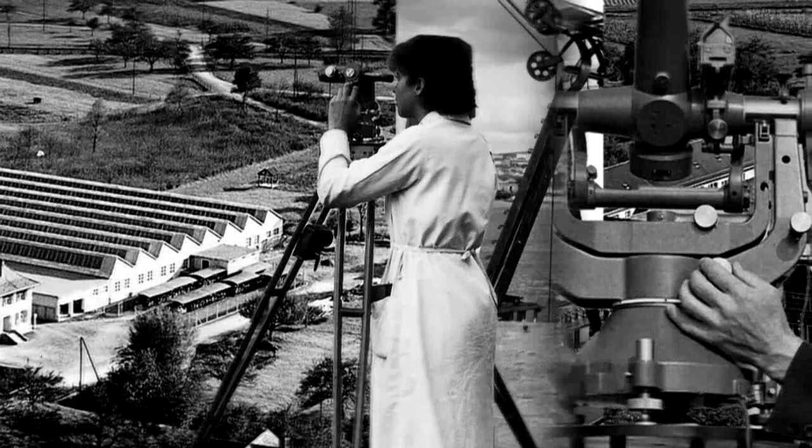In 1921, the engineer Heinrich Wild founded a company by the name of Heinrich Wild Werkstätte für Feinmechanik und Optik, situated in the Swiss Rhine Valley. He rose to international fame with his precision theodolites. Various innovative instruments devised for measurement techniques have ever since been produced by his company.

In 1990, the startup company Wild Heerbrugg was taken over by Leica. In 1998, Polymeca arose from Leica Geosystems, which is now part of the Swedish-based Hexagon Group. Polymeca remained faithful to the legacy of the Swiss pioneer Heinrich Wild.

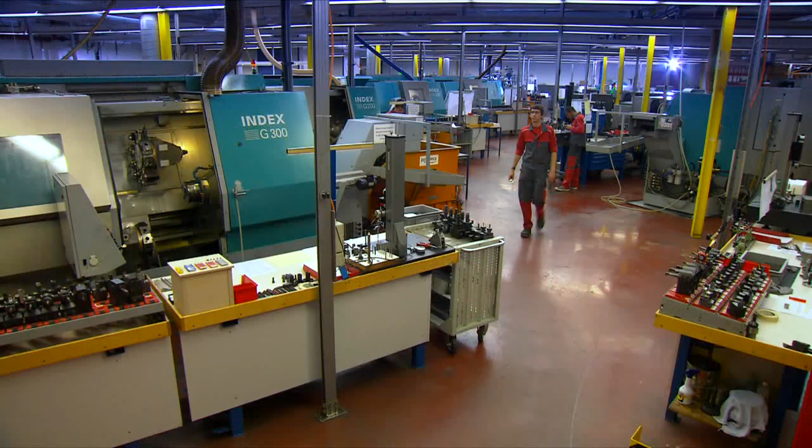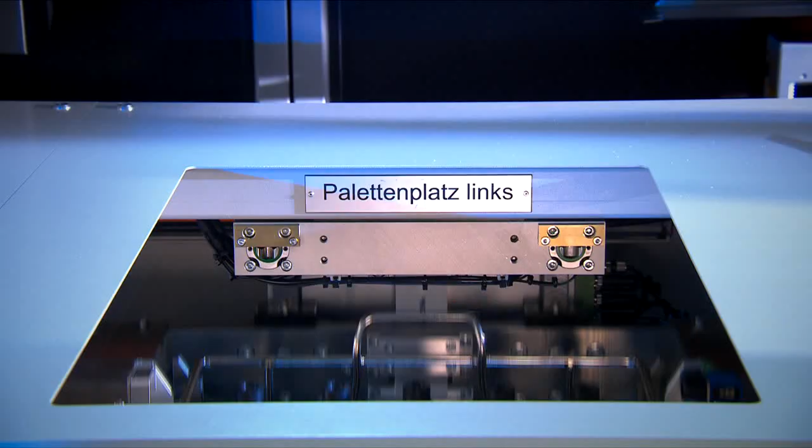With its 130 highly qualified specialists, the company ranks among the world's leading providers of optical products with fine precision mechanics, intended for the discerning client both from the respective industry and from Hexagon's network of subsidiaries. As a one-stop shop provider, Polymeca produces mechanical components and systems for industries that require items with precision degrees in the micrometer range. Clients include companies in the medical technology, machine industry, and chip equipment sectors.

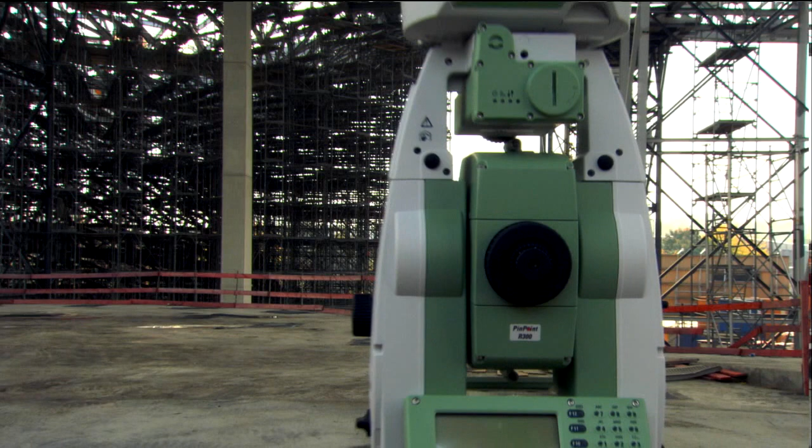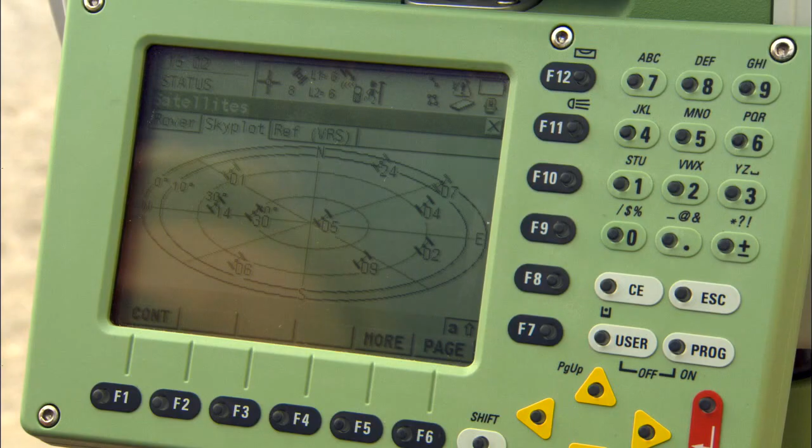Modern theodolite systems produced by Leica Geosystems are equipped with GPS and achieve positional accuracy at the millimeter level. They are generated by the high-precision rotation and tilting axes. These rotary axis systems, designed to meet the highest standards, are manufactured only by Polymeca.

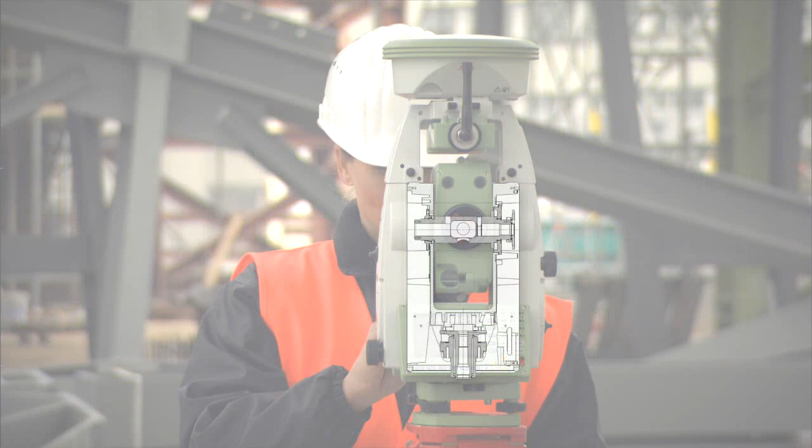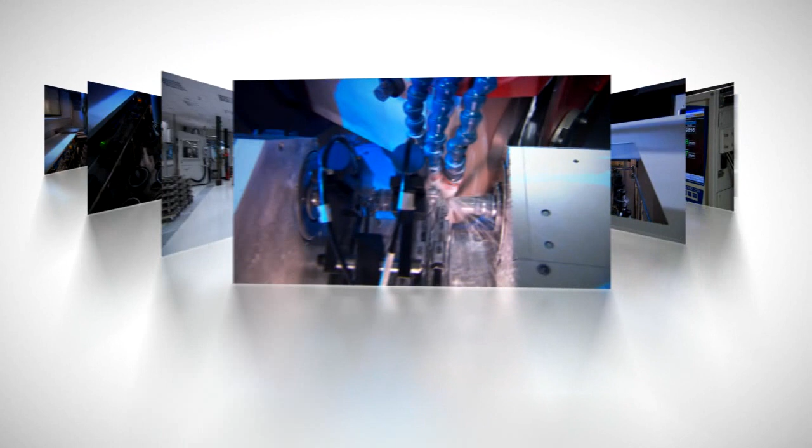For over 20 years, Polymeca has produced the rotary axis systems using conventional grinding machines. However, a new chapter is now being written in the history of the company. Against the backdrop of a highly competitive market, the company has invested 4 million Swiss francs in a full-fledged production unit, which provides the basis for a quantum leap forward in the production business.

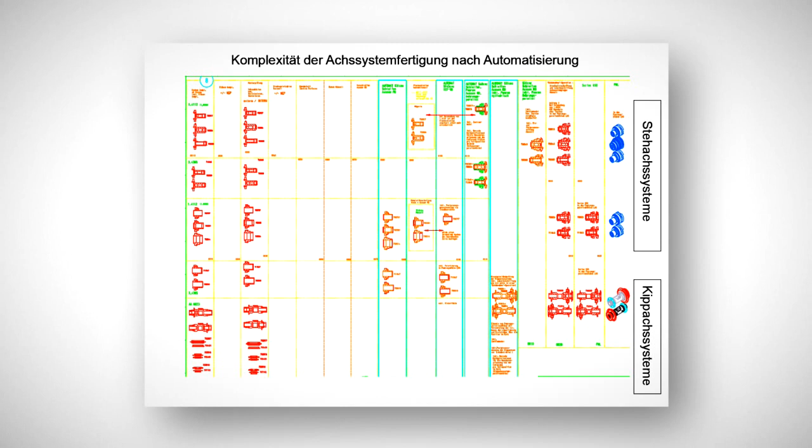The new equipment allows Polymeca to reduce the number of processing steps from 20 to an unparalleled 5 to produce the rotary axis systems. This enables the production to be flexible and economic without facing competition, even where different batch sizes are required. The processing time has been cut to half, the capacity increased by 35%, and the total inventory value reduced by 20%.

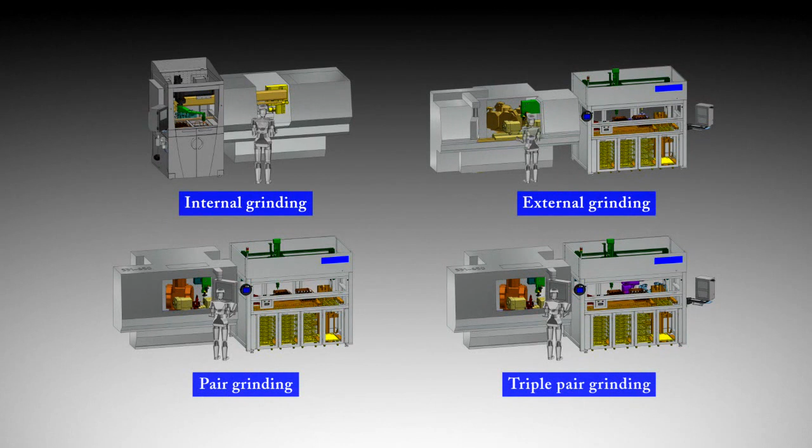In the fully automated grinding center, the rotation and tilting axes receive their final form, which is accurate down to the micrometer level using 4 precision grinding machines. These ultra-modern machines are equipped with 960 axes made from aluminium blanks, which allow the machines to be operated unattended during weekends.

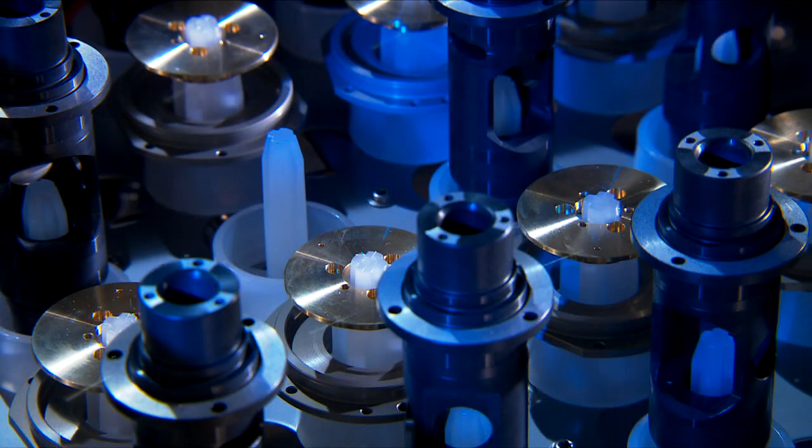A robotic gripper lifts, holds and transports all components of the tilting axis, including the axis, the 2 bearing flanges and the plate-shaped carrier for the indexed glass disc, and tightly positions them for further processing.

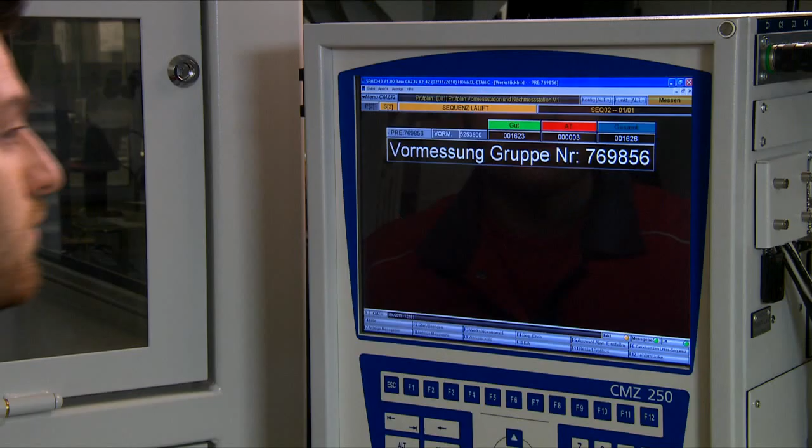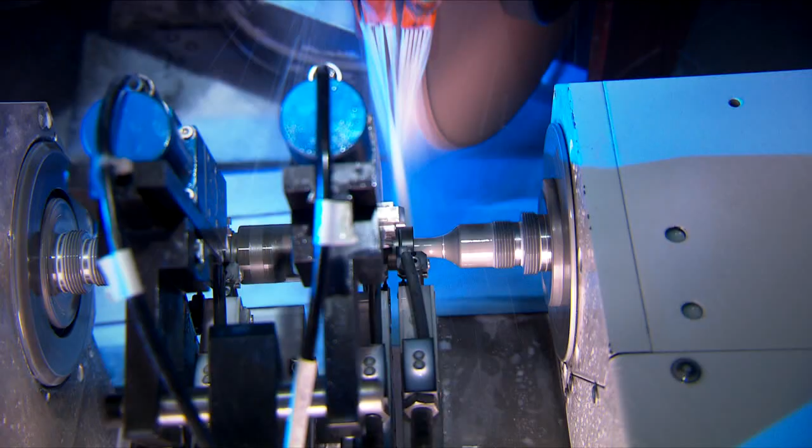On a rotary indexing table, 3 measurement units perform a pre-process measurement on the bearing flanges and the plate-shaped carriers. The results arising from the measurement operations affect the processing of the rotary axis. This allows the 4 components of the tilting axis to be processed on one machine and in perfect alignment with each other. These triple-pair grinding applications are unique within Switzerland.

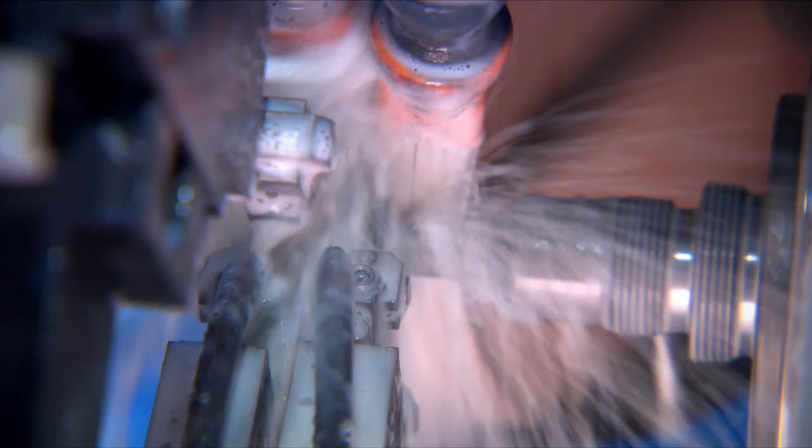They cause the axis to precisely match 3 positions with 3 other components. Simultaneously, the axis is ground in one run and in one clamping setup by 2 profiled grinding discs aligned parallel to each other.

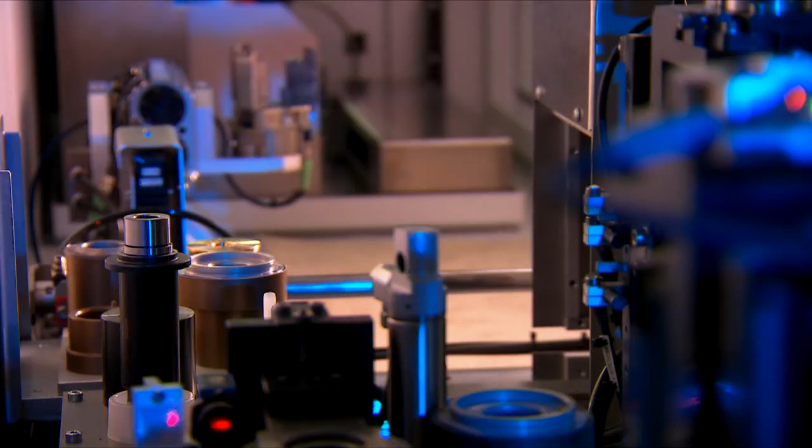This procedure is carried out on the basis of unrivaled high-precision processing in the micrometer range. After the processing, the components are laser-marked and passed on in a group.

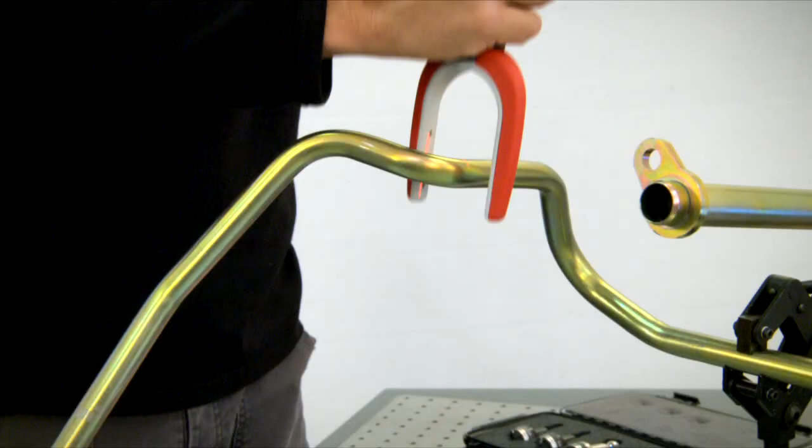Pomeca's metrology division is equally characterized by highest precision, ranging from processing procedures to top-down control. The ROMER Absolute Arm is a portable precision coordinate measuring machine used for efficient industrial 3D control. Its measuring arm was developed by Hexagon Metrology and is manufactured by the Hexagon Group, which also owns Pomeca.

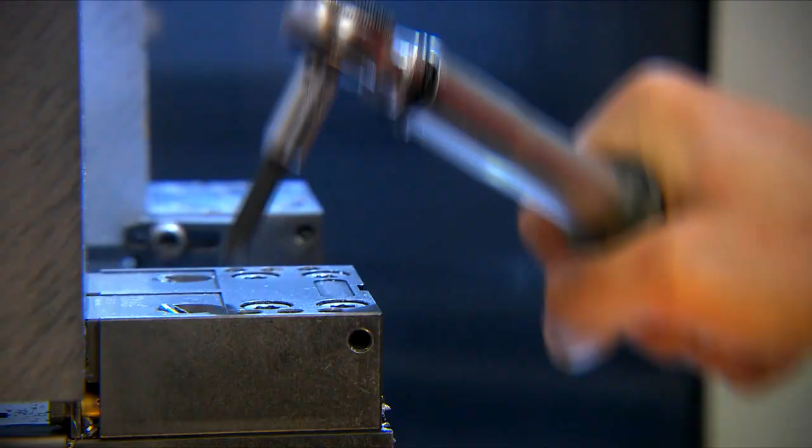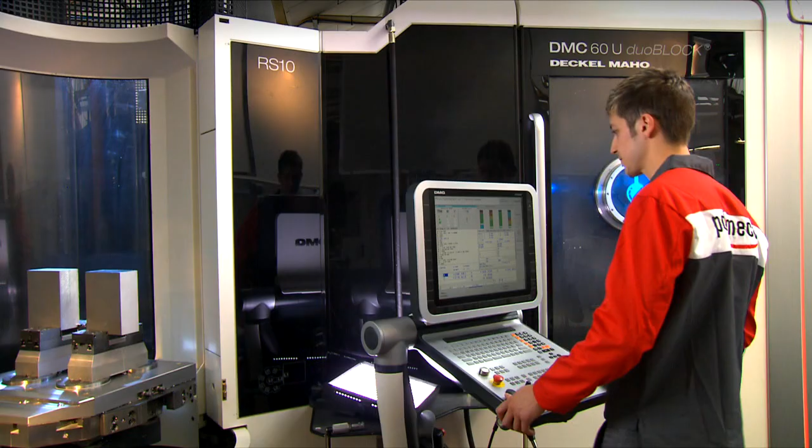Pomeca produces a rotary joint for the ROMER measuring arm using a 5-axis high-speed milling machine. The use of the 5-axis machine saves time, allowing the joints having a dual housing structure to be milled and completely processed in only one clamping setup.

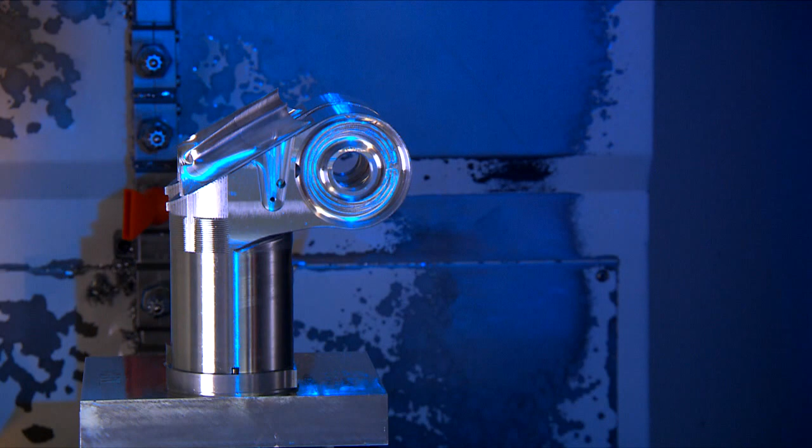4 or even more workpieces are milled from a solid block of aluminum in only one clamping setup, performed in a fully automated process. This applies to components with a size of 600 by 600 by 600 millimeters.

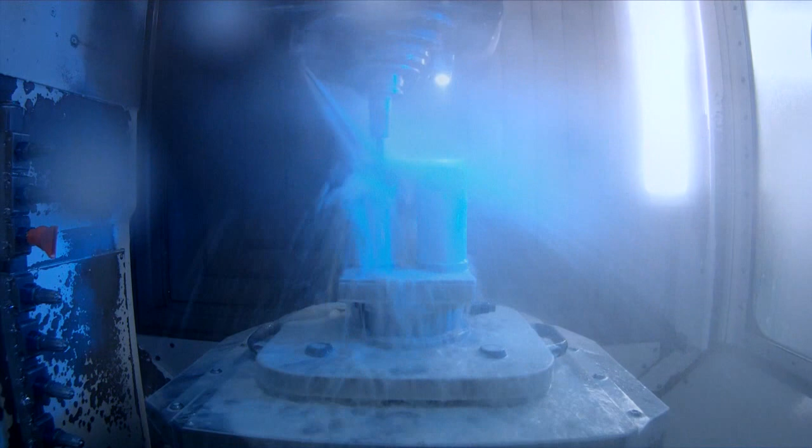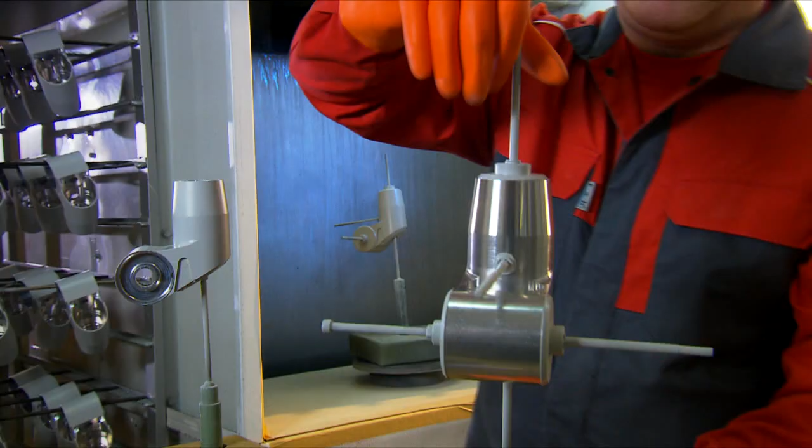The ROMER components are anodized and are now ready to be coated with lacquer at Pomeca's paint shop. Certain parts of the joints not to be lacquered need to be masked prior to applying lacquer. This is done manually and requires the qualified specialists to be very precise.

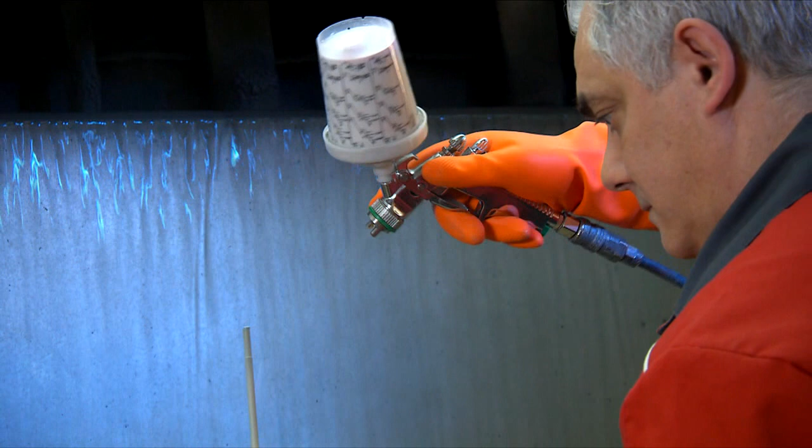The company's surface technology guarantees aesthetically perfect components and lean operations due to high levels of process depth.

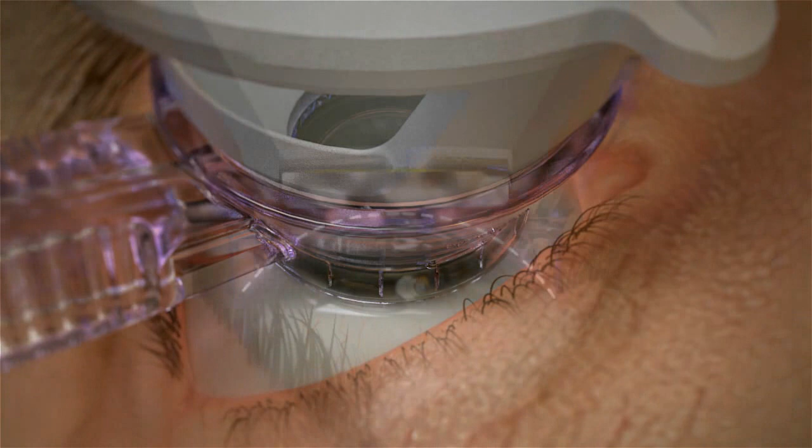The company Alcon produces innovative equipment for laser eye surgery. An accurate device which adjusts the laser beam and monitors eye movement is required for the laser vision correction using Wavelight.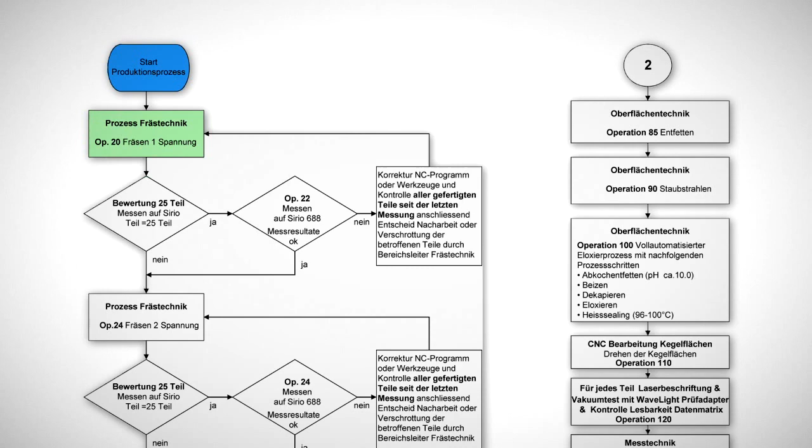Due to its pioneering processing procedures, Polymeca is able to produce these highly complex devices, ensuring high quality and low costs.

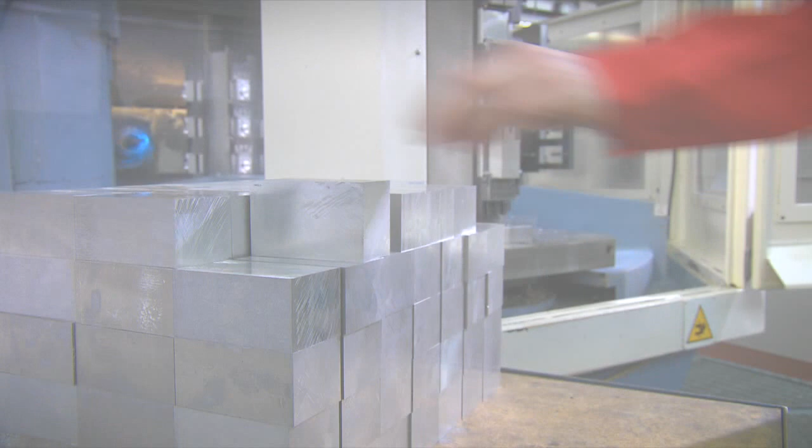This cone-shaped optical lens carrier made from aluminum blocks is processed in 2 clamping setups using a 4-axis milling machine. 16 blocks are simultaneously clamped to allow the processing time to be minimized.

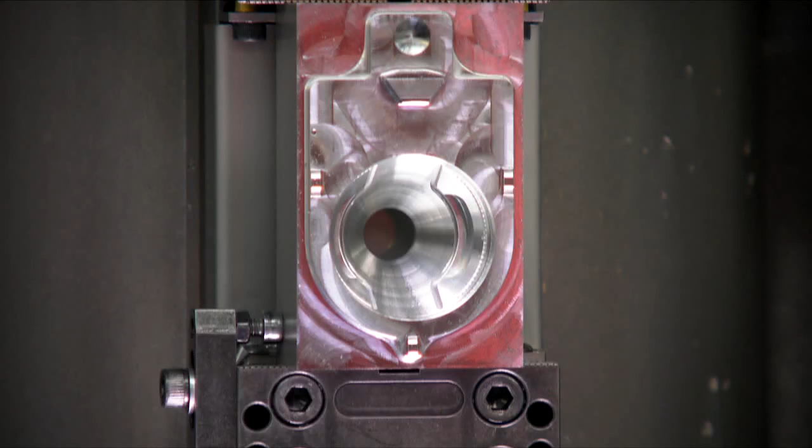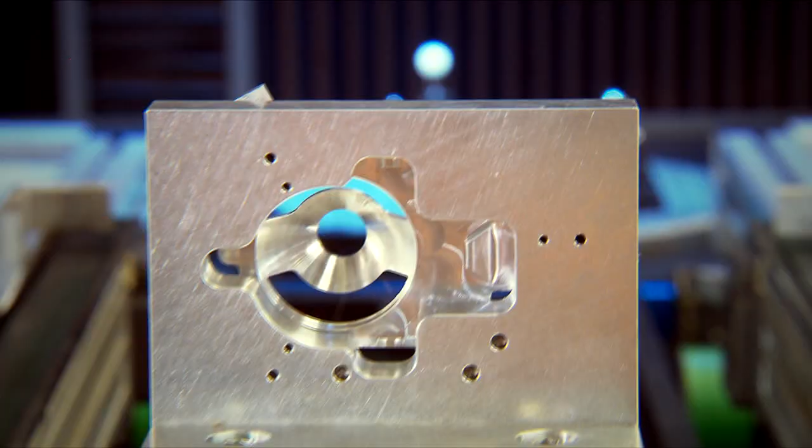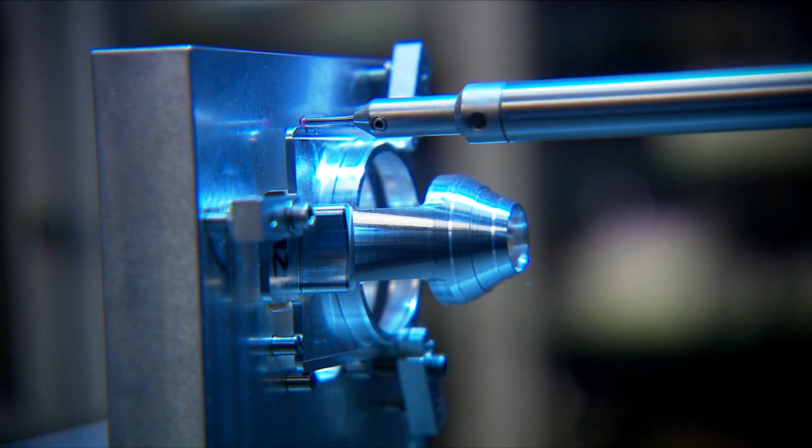The processed optical lens carriers are inspected in the production environment using the Sirio measuring robot with automatic temperature compensation. The robot exhibits a measurement accuracy of 5 micrometers. The consistent measurement and control concept developed by Polymeca guarantees highest precision and reliability for each production order.

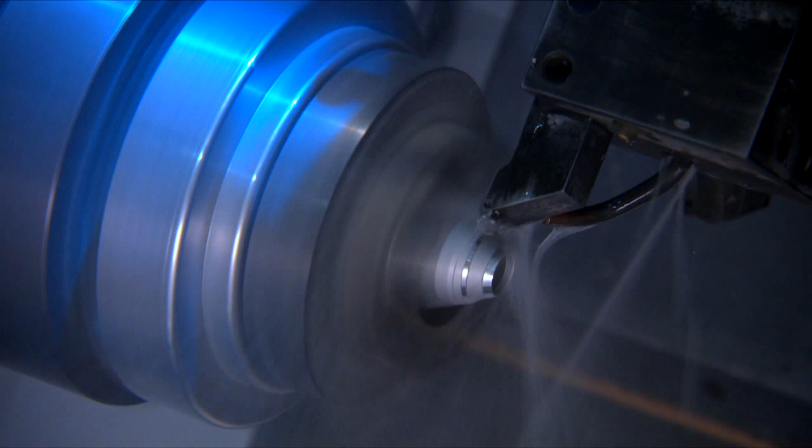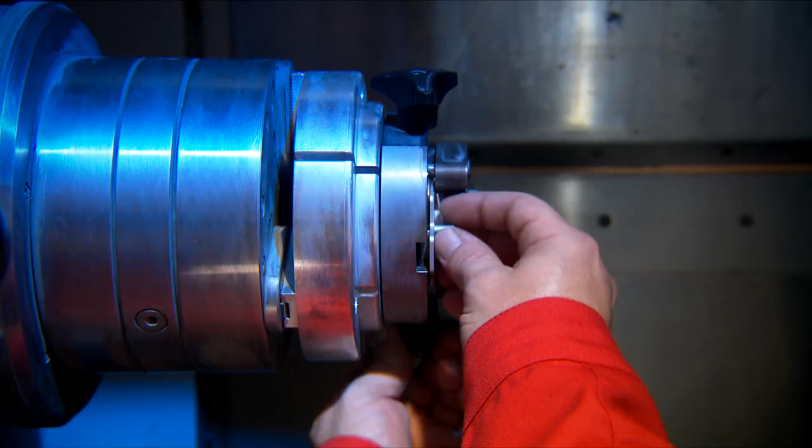The tip of the colorless anodized cone-shaped optical lens carrier is finalized using the high-precision hard-turning machine with hydrostatic bearings. Hard turning is an efficient alternative to grinding and guarantees a measurement accuracy of 4 micrometers.

Prior to shipment, each WaveLight cone is laser marked and manually inspected.

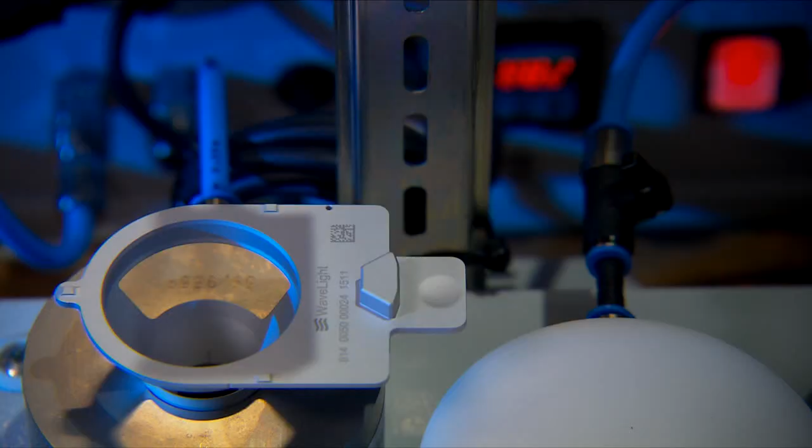Polymeca stands for state-of-the-art manufacturing technology. With Polymeca as a competent partner for highest accuracy parts, we are able to retain and even to extend our technology leadership. Our Leica Absolute trackers require the most precise mechanical parts, which Polymeca is able to deliver for our customer benefit.

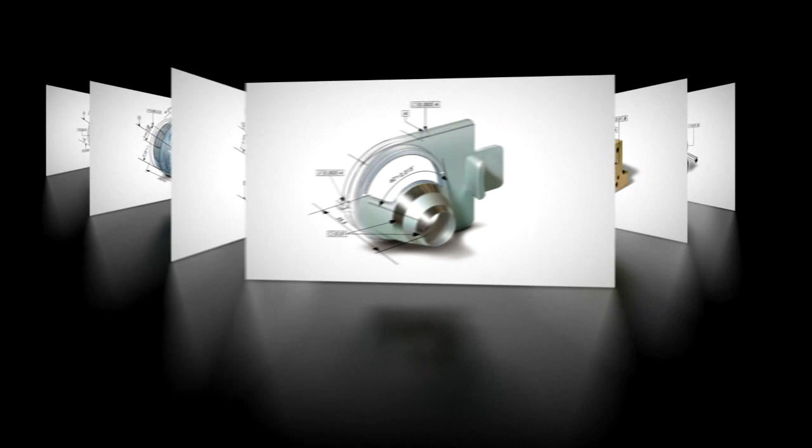Polymeca ensures accuracy down to the micrometer level whenever highest precision or complex shaping operations are required. Individual, reliable, competitive and flexible, Polymeca is the partner of choice for all professional users in the mechanical industry.

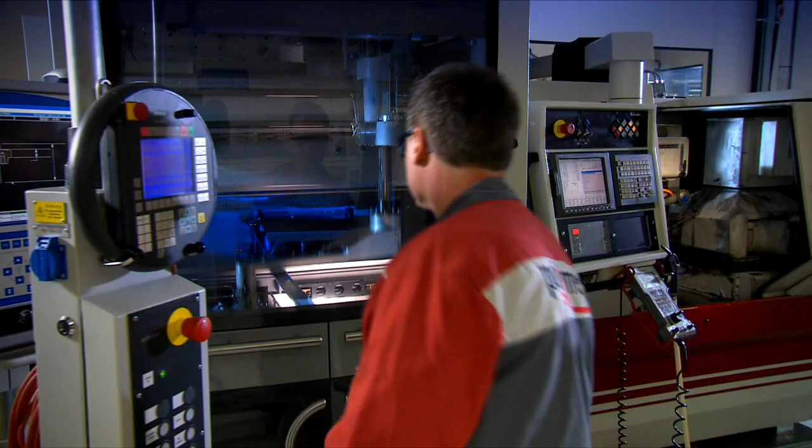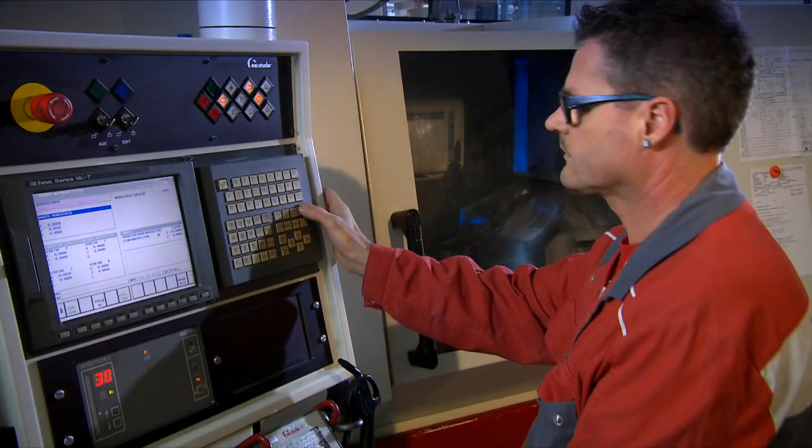Our fully automated grinding center sets new standards with regard to precision and efficiency. An impressive number of 7,000 hours per year provides great flexibility in responding to client demand variability. The expertise allows Polymeca to become one of the leading providers.

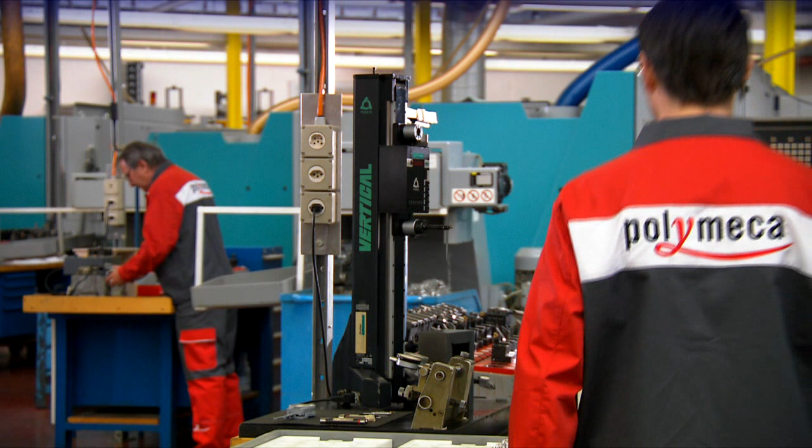Thanks to our flexible machining center, clients benefit from an annual capacity of 5,000 hours of cost-efficient multiple machine work that requires the employee to attend to 2 or more machines running simultaneously.

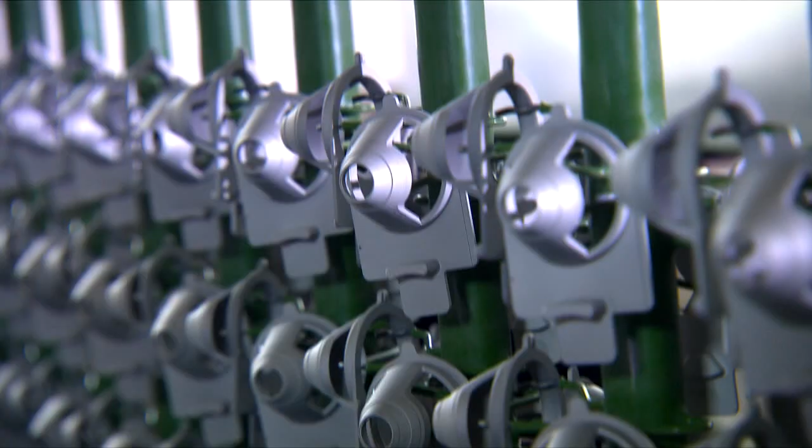Polymeca's high levels of process depth, ranging from the handling of raw material to the surface finishing operations, ensure efficient processing procedures and a very broad range of products.

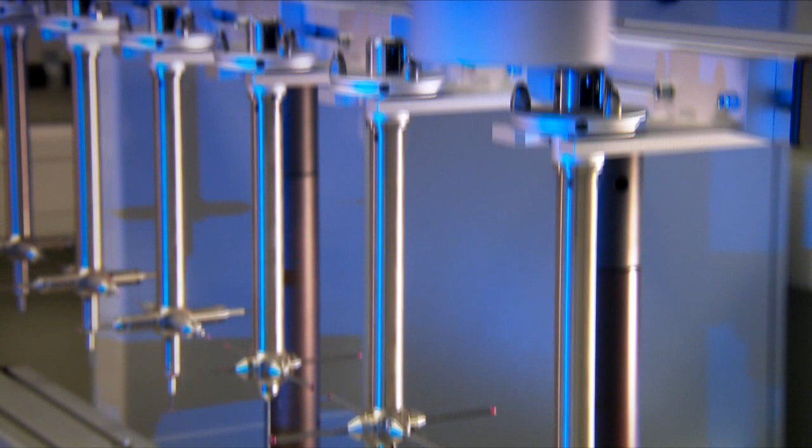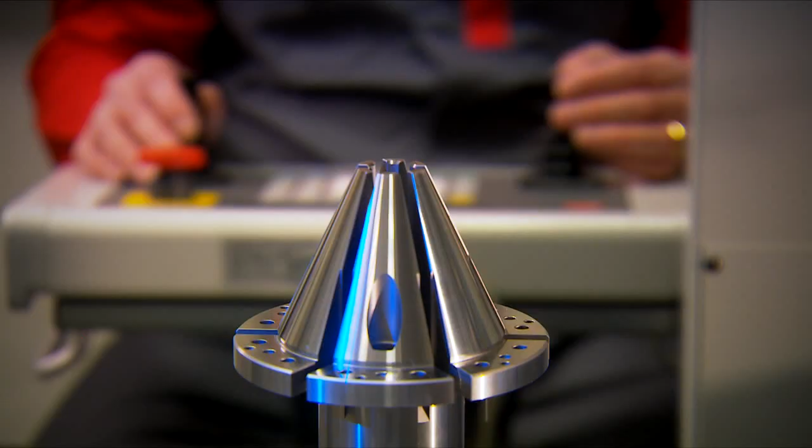The high level of measurement competence gives Polymeca an unbeatable advantage in the marketplace. The company's 3D measurement laboratory maintains a constant room temperature, which can display variations of a maximum of 0.5 degrees centigrade per hour, allowing a measurement accuracy of less than 1 micrometer.

Rely on Swiss precision, tightly and precisely controlled during all stages of the process operations. Polymeca, precision engineering, as precise as your measurement devices, since 1921.